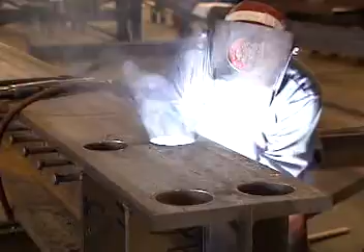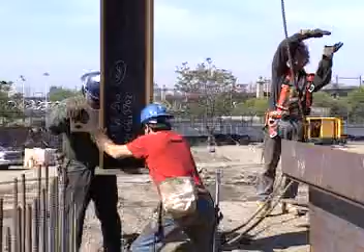After the steel has been produced, every piece of steel in a skyscraper or bridge must be precisely cut, its holes properly placed, its pieces welded in exactly the right location. Every single bolt in the structure must be located and attached at the proper place, and all this must be exact to 1/16 of an inch, so that the steel members will fit together perfectly at the site.

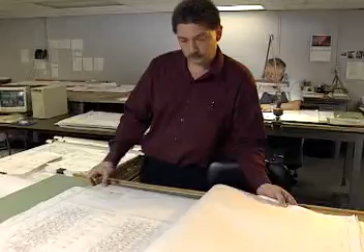That's why a process called detailing is such an important and integral part of building today's complex steel-based structures. It is the detailer who must develop drawings that are so precise that they will show the fabricator the exact dimensions required for manufacturing the finished steel components that will go into the structure.

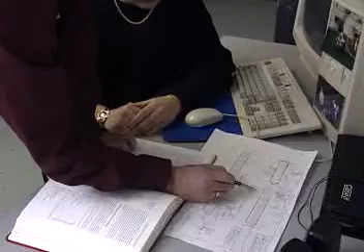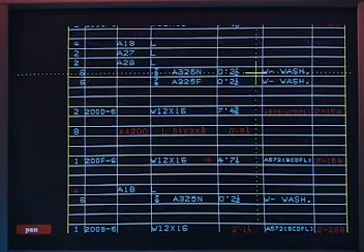To accomplish this formidable task, the detailer will take the design prepared by the structural engineer and, on paper, build a 2D or a 3D model of the steel frame of the building or bridge. It is from this model that the detailer will generate a complete list of every member in the structure, as well as shop drawings for all the individual steel pieces.

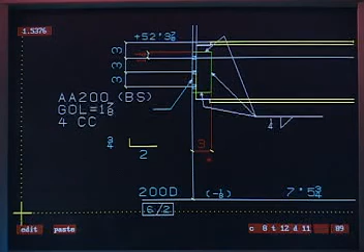To accomplish this process, the detailer must compute the length of the beams and columns, as well as the bolts and raw material to be used. The detailer must also keep track of every hole in the entire structure. If a change is made in a beam connection or in the hole of one column web, it will be up to the detailer to indicate exactly how that change will affect all the holes in those beams.

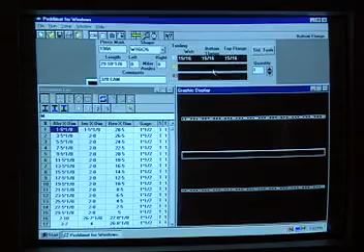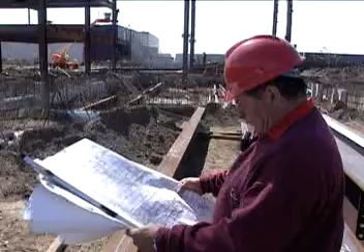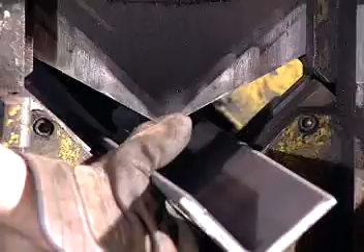In addition, if a member has been changed on the shop drawing, the detailer must also change the erection drawings that will be used in the field. All this information is developed with the help of computers, and it can be downloaded to the drill line in the shop or to the angle master to show them how to drill holes for the angles.

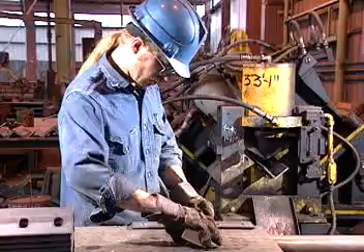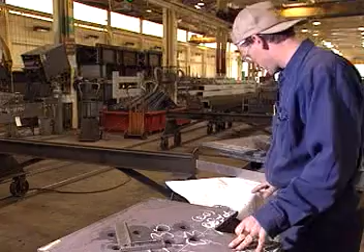But it's important to realize that although these critical tasks are done with the assistance of a computer, they are not done by the computer. The detailer's training, skill, and expertise is the key to the process. It is the detailer's ability to translate the engineering drawings of a large structure for the fabricator so that the fabrication shop will know exactly what must be done to prepare the steel.

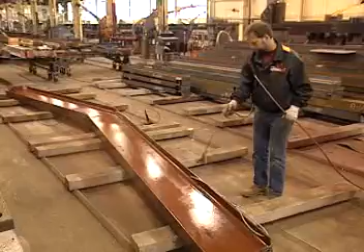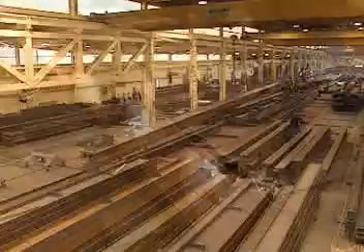The detailer will also indicate the preparation, cleaning, and painting of the materials, depending on its specification. If that weren't enough, the detailer may also have to consider and take into account shipping requirements, sometimes even the cranes that will be used in the field, and how those cranes will load and unload members from the truck.

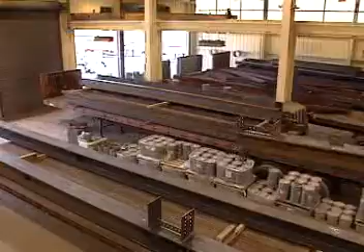Before the fabrication shop actually drills and cuts the steel members, the detailer must submit his shop drawings to the engineer of record for approval to make sure that the shop drawings are fully compliant with the engineer's design.

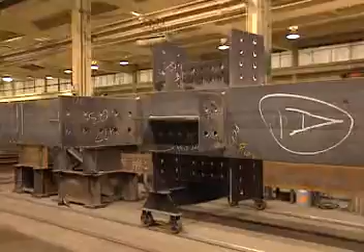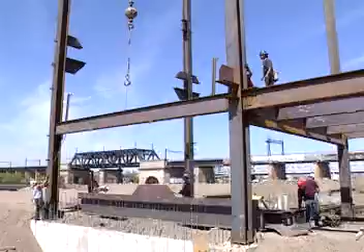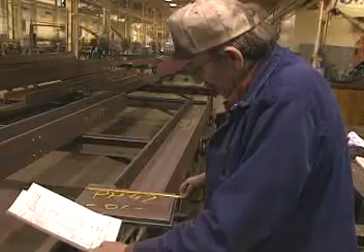It's clear that steel fabrication plays an important role in joining steel members, even before the beams and girders arrive at the construction site. This is one reason why on-site building with steel is so much faster than is possible with other materials. At the fabrication shop, the steel is cut, punched, and pre-assembled as much as possible, according to the detailer's drawings. These drawings can be used to generate computer disks that will drive the shop's fabricating machinery to cut and drill the steel with absolute precision.

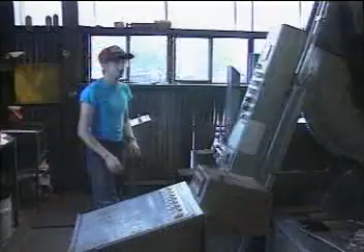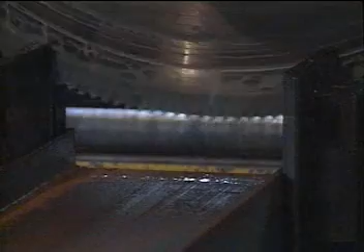If cutting is necessary, the operator inputs the size and the desired length of the member. The stock lengths of steel will enter the cutting machine by conveyor. An automatic arm stops the stock at exactly the right point, and the blade cuts the steel. The piece will then be labeled and rolled out.

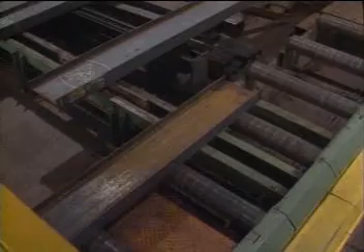From the cutting area, the steel members will travel on a conveyor to the next station, where holes will be drilled to make the bolted connections. Here again, these critical processes are precision controlled by computers.